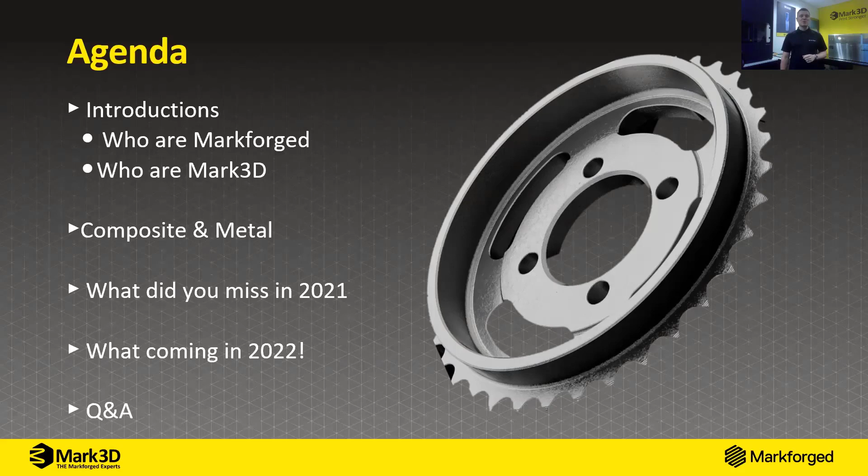So, who are Markforged? Most people have heard of Markforged these days. I mean, 3D printing in general is nothing new. It was invented back in the 80s by a guy called Chuck Hull. So, the history of 3D printing is there's tons of tech out there, all with their niches and positives. But Markforged came to the market in 2013 with strong parts. What they were fed up with was real big, high-end printers costing millions of pounds, just in the blue chips of the world, and no accessibility to real engineering grade materials. So that's where they stepped in with their composites, and it's gone somewhere from there.

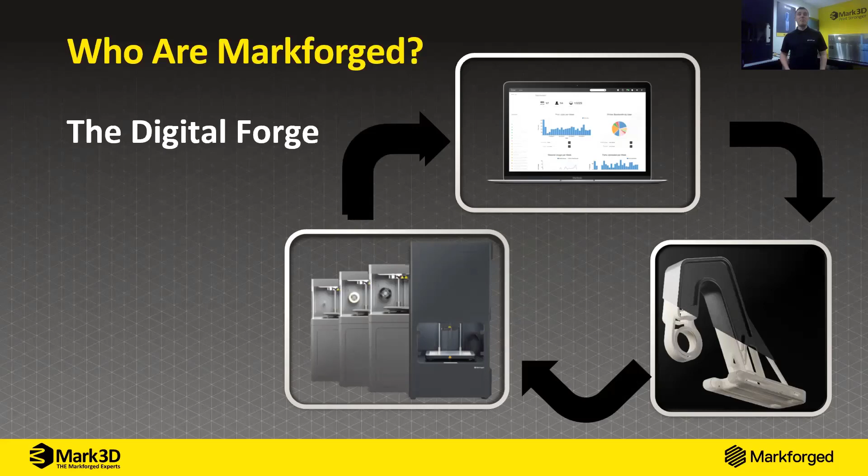They've gone into metals and with supersizing composites. So they have this concept of the digital forge, which is the marriage between software, engineering grade materials, and precision equipment. And that kind of closed loop concept gives you repeatability and your part at the end of the day, which is what you're really interested in.

So Mark3D, who are Mark3D and why do we exist? So Markforged obviously are based in the US, in Boston, or just outside in a place called Watertown at the moment. And they use a reseller channel, partners, to distribute, support, and teach you guys how to use this stuff in location. So Mark3D do nothing but Markforged. We have dedicated ourselves to their products, their software, their training, their materials. So it's all we do. So we're the experts in it, basically. So if you want to talk to Markforged, you basically come to us if you're in Northern Europe: UK, Germany, Benelux, Austria, a whole host of countries in Europe, basically. So we've put in literally thousands of machines, 6 offices, a load of employees. It's boring stuff really at this point, but essentially, if you want to know Markforged, you should be speaking to us. So enough of that.

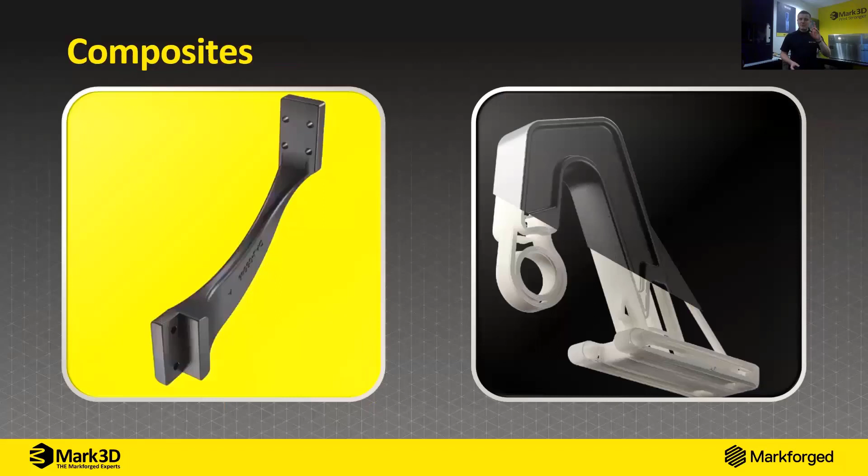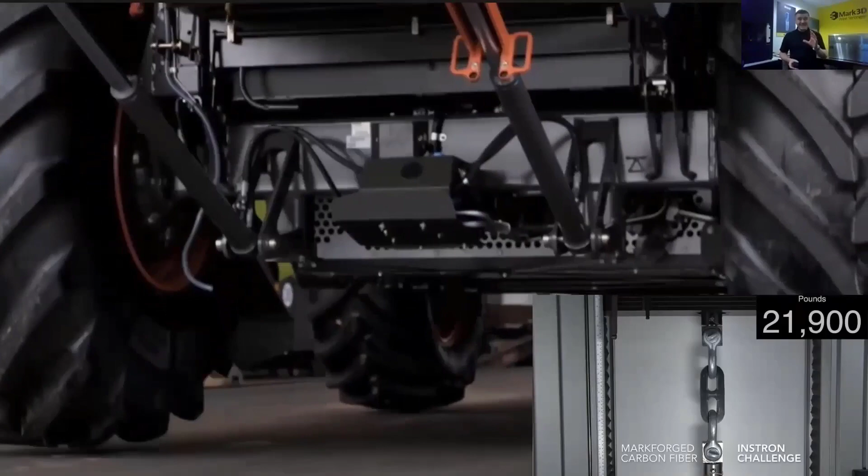Let's get on to the technology. Now, as I mentioned, there's 2 core technologies, composites and metals. So there's a brief video here, playing there basically. So this is a 20-second clip of the composite technology, just the workflow from software to printer to end-use part. What the composites really do, what our unique element is, inlaying continuous fiberglass that you can see there, picking up that combine harvester, which weighs 16 tons by the way, giving you phenomenal strength. So we're using like a polymer FFF kind of technique, which most people are familiar with, but inlaying those premium materials. So as I mentioned, that combine weighs 16 tons. In the bottom right, there was a carbon fiber chain link of the same size.

Looks like a problem with the sound. Okay, apparently people can't hear me. Bear with me just 1 second.

A bit muffled. Yeah, it sounds like it's coming out of an enclosed capsule. Okay, is it any better if I'm a little bit closer to the microphone? Let me try switching between microphones. Bear with me, one second. Better? Okay, perfect. I'll just speak up and I'll be a bit closer. It's a bit in your face, but apologies for that. Okay, as I was saying,

composites, you saw that customer video of ours from Claas. That combine harvester weighs 16 tons. The reason we can get these phenomenal properties is inlaying continuous carbon fibre, Kevlar, or variants of fiberglass to build up a strength and open up different applications.

So in the bottom right was a chain link with carbon fibre. That failed at just over 11 tons. That was printed on a desktop printer, not much bigger than if you put your thumbs and your forefingers together like that. Phenomenal strength. So if you're machining aluminium and you want that kind of strength, we can swap that out with a composite part printed overnight at a fraction of the cost.

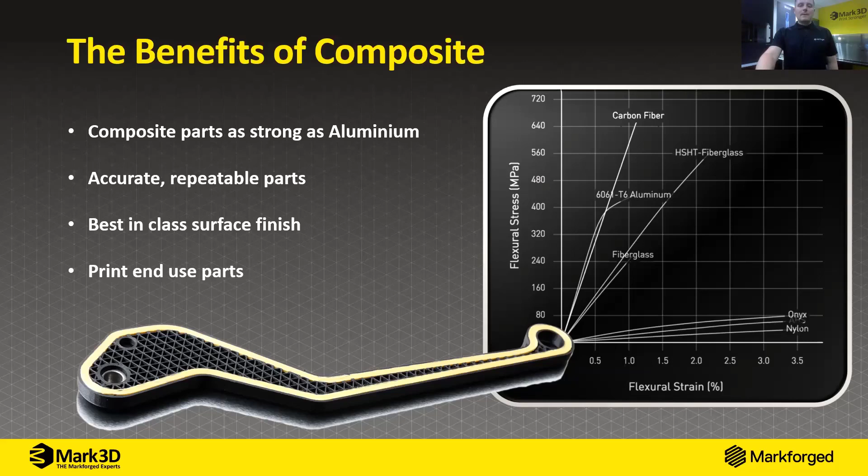As you can see by the stress strain curve there, we've got our polymers right down the bottom, but then the fibres we use also plotted against the 6000 series aluminium. So you can see the carbon fibre there with its flexural strength being phenomenal by comparison. So enough of the composites. Hope you can all still hear me.

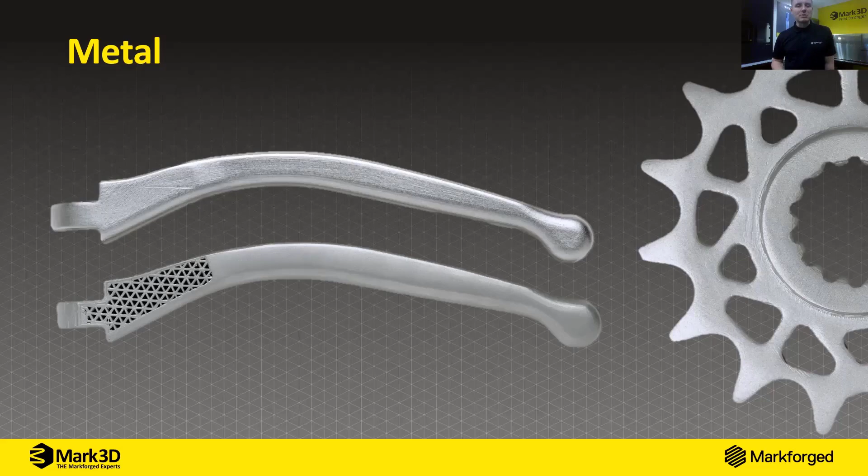Onto metal. So this was a new development around the 2017 mark. 3D printing metal is nothing new, but it has traditionally been phenomenally expensive. Beyond that, the health and safety issues of granulated powder are the main concern for people looking at it. It's not necessarily the price. If you've got the application, the technology's there, but bringing something that could be carcinogenic in a granulated form inside is a big no-no. So Markforged decided to address that.

And what they've done, they've gone for a blend between MIM and FFF technology, the filament technology that we extrude. So we put our metal in a polymer, in a wax kind of binder, and extrude that just like the polymer printers. Completely safe to handle. You can see the Metal X over my shoulder here. We can have that printing in any environment, in all honesty. Classroom environment through to workshop.

Then what we do is flip back to the post-processing of MIM. So we pop it in a wash, dissolve the wax. That gives us micro porosity, which allows us to burn out polymer and sinter our parts into a dense metal part.

Please try the other mic options. The sound is okay. Okay, someone's asking me just to flip between the mic again. Let me try something. There we go, guys. Apologies. Can everybody hear me? Perfect. Apparently that's clearer. So we'll crack on.

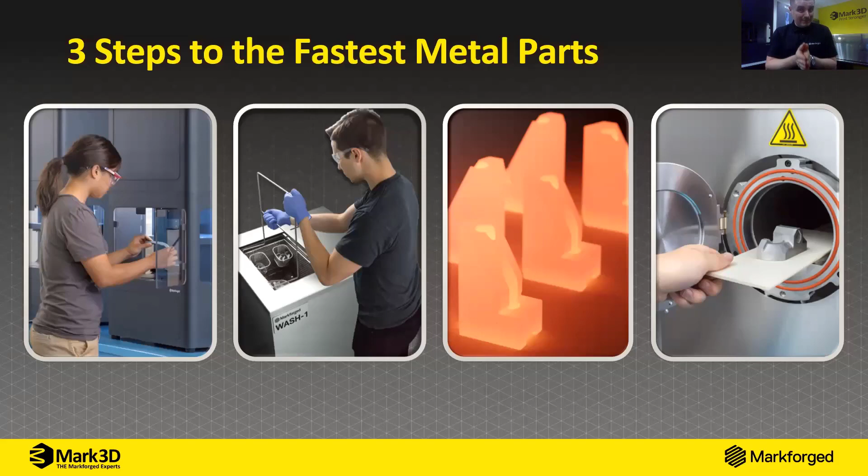Where I was, with this three-step process, it's the fastest way to a metal part. There are quicker technologies to produce and solidify metal, but total process time, this is the fastest, cheapest and safest way to a metal part. So you see in the top right there, we've got a speeded up time lapse of the printing process. Again, we're extruding that material, putting down a ceramic between the support and the part that breaks down in the furnace. So no machining of supports, they drop away after the sintering process. It makes it nice and simple.

Bottom left, you can see our Sinter 2 there. I've got a Sinter 1 behind me over my shoulder here. This is the furnace that Markforged have developed to sinter these parts. The real magic, to be honest, is in the software. When we extrude our parts, they come out in what we call a green state. It's like a hard clay at this point, but it won't represent your CAD. It will typically be about 20% bigger. After the wash and sintering process, that shrinks to size.

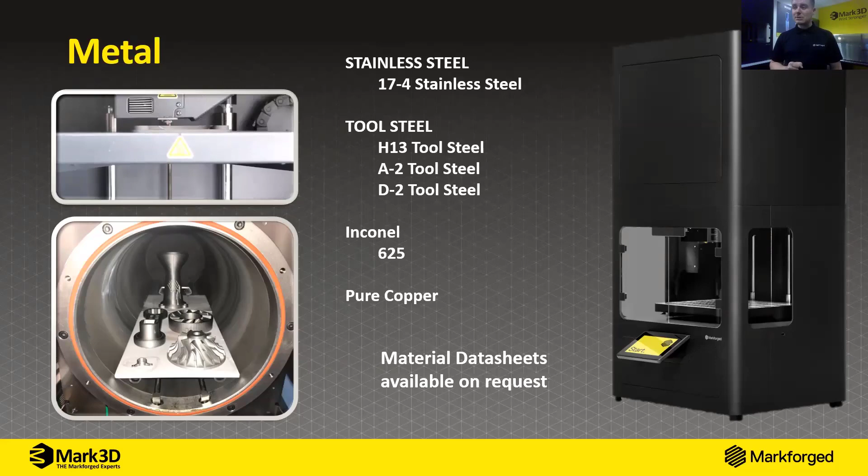You can see there the materials we currently have on offer from stainless, tool steels, Inconel 625 and pure copper. So it opens up a wide range of applications. Now the top 5 benefits of the Metal X then. Fastest metal parts. We're talking next day metal, a 2-day turnaround. That means there's no heat treatment afterwards to remove stresses, no machining of supports. Our surface finish is best in class. We can actually improve it while it's in its green state.

We can work it while it's like a hard clay before we sinter it to get a lovely near mirror finish. We're the only FFF style metal printer that can do solid parts. There's some technical reasons for that. It's to do with the debinding. There's 3 ways of debinding. We use a solvent to dissolve the wax binder. That allows us to do fully dense metal parts if you wanted to.

If you don't, we can put an infill structure, a triangular gyroid infill inside there and put a completely encapsulating skin over that infill. Now that's another unique benefit because with powder-based technology, you normally have to leave a face open, should I say, to evacuate that unsintered powder.

Quick release supports, I've already touched on that, but I'm a machinist by trade and I understand the frustration of getting a beautiful metal part out of a 3D printer to then have to spend a day programming and milling those supports away, especially when you're doing something like an Inconel 625, which just eats milling cutters.

There's 6 materials. I've already touched on those. I won't repeat myself, but the benefit is the changeover time is so simple. It's a spool on, spool off. We say it takes 10 minutes. It's 2 minutes manual time. We just have a warm-up process of about 6 minutes to make that filament malleable enough to start printing. It heats it up to about 50 degrees C.

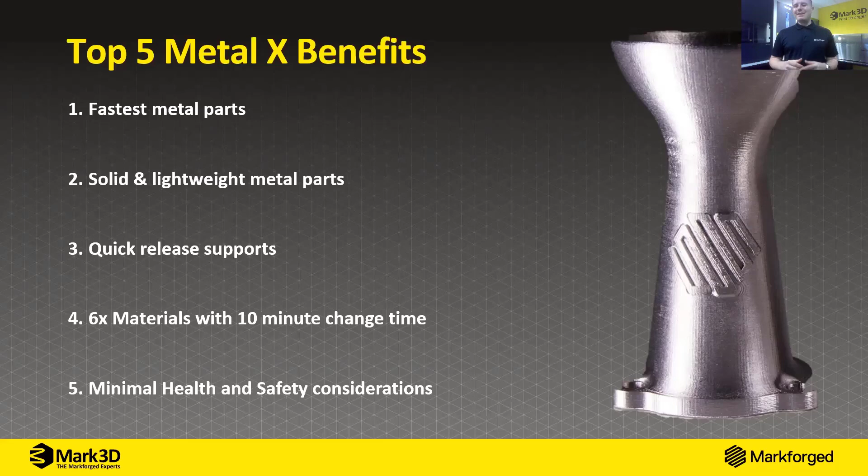And then the big one, the health and safety element of it. I used to run a 3D metal printer that was laser-based. I am not knocking it because I loved my machine, but I used to look like a beekeeper. I'd have a positive air pressure mask on, anti-static shoes, paper suit, there'd be all kinds of PPE. And now we just press print, get your part, away you go.

So we've covered the materials. Let's cover what Markforged released in 2021, just in case you missed it. So starting with part quality, people think we're best in class surface finish, but we're constantly working on our parameters to improve that part. And the reason for that, everyone likes a nice part, but if you're making end use parts that you're selling and you're replacing injection molding or machining, you want the best part you can get.

So on this screen here at the moment, we've got a picture of what we would call our unidirectional roof fill. So that's the back and forth motion of the extrusion on your top face of your part. Now, you used to be able to see what we would call tram lines. We've now improved our parameters, and that is a lovely, beautiful, smooth finish now.

So if you're already a user of Markforged and you've got your file, what we call an MFP file, set up, just printing, please reslice it. You're going to see some beautiful improvements just through reslicing, not through any hardware updates or anything like that.

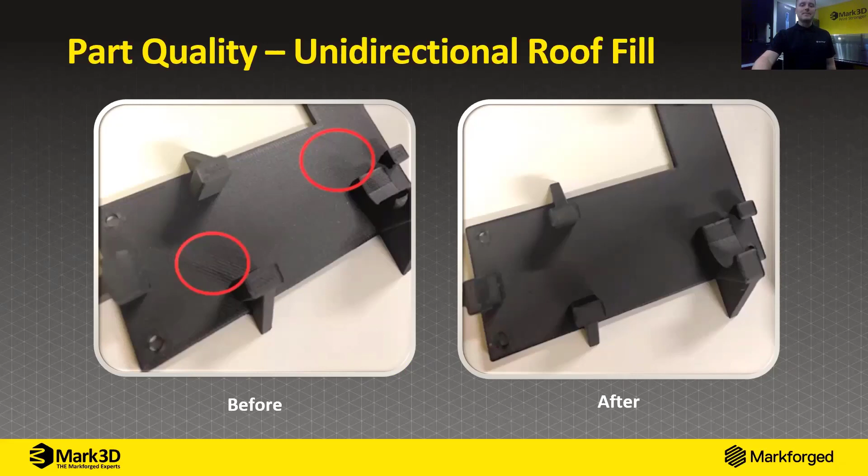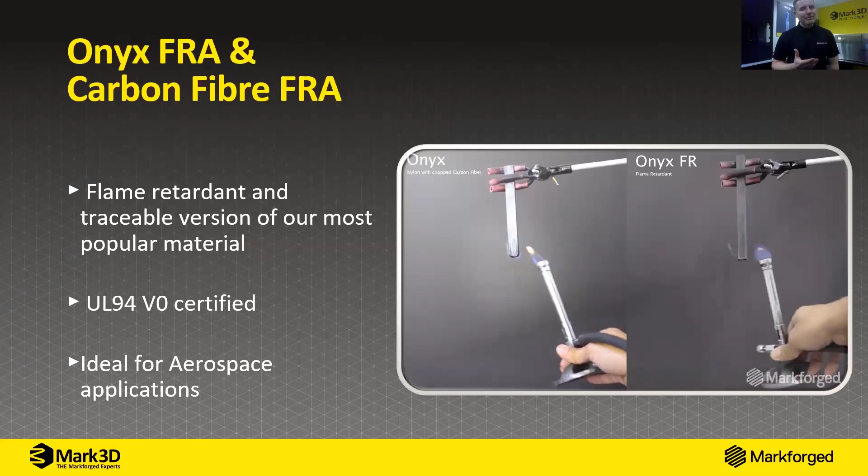So new materials, we're constantly releasing new materials. In 2021, we released Onyx FR-A and carbon fiber FR-A. So we had FR already. So if you're not aware, we have a flame retardant version of Onyx, which is UL 94 V0 approved. Basically, it just means self-extinguishing on a vertical sample, doesn't drip, those kind of elements.

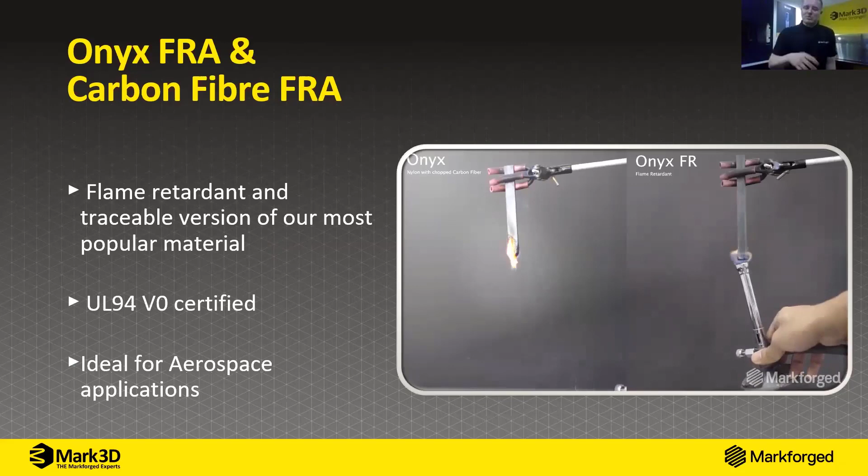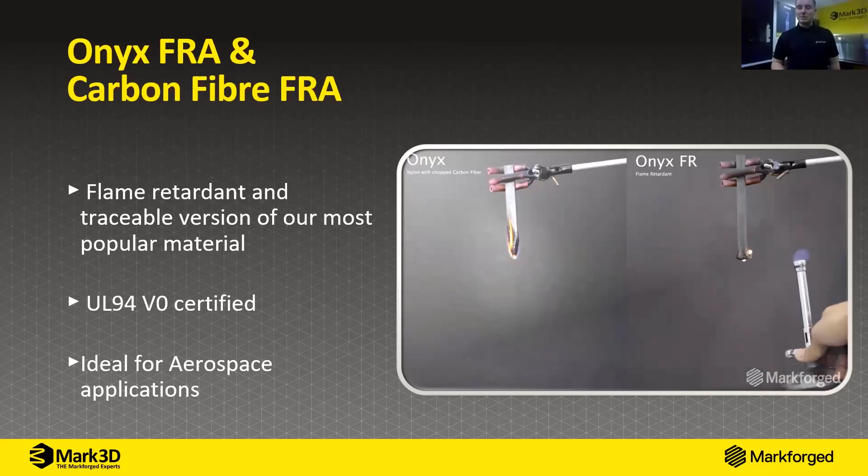What we've done with the abbreviation of A on the end is made it traceable. So we'll supply the certificate of conformity and traceability on those materials. So if you're in aerospace, if you're in the rail industry, if you're making parts where you have to prove your bill of material came from here and followed this process, this is the material for you. We obviously had to do it for the carbon fiber as well, because there's no point in just printing a polymer. We have to give you the strength behind it as well.

Machinery wise, my favorite printer at the moment, it will be replaced soon, but at the moment my favorite printer is our X7 in the showroom. This is the industrial composite printer. It is phenomenal. I won't get into all the ins and outs of it, but I just love it. What Markforged did is release an even tougher version of their printer. And what we mean by that is they ruggedized it, made it useful in field.

So you can see there, the top half of an X7 sitting on top of a Pelican case. But it's not just stuck in a box that's airtight. They've put everything you need in there to run for months on end in field. There's material storage. There is all the spares, all the tools, everything you need to keep that running in field.

It's very military looking. And to be honest, the military use a lot of these. Stick them in the back of wagons, print on demand spares in the most challenging environments. But that applies to industry as well. Anything where there's a requirement to travel, this is now an option to keep it on the road, keep it moving and keep your parts printed.

Improve software. There's a lot to go through in software. The first one I picked sounds like a dull one: new views or GUI in Eiger. But what this is going to do, I can't share too many details today, is enable so many new features.

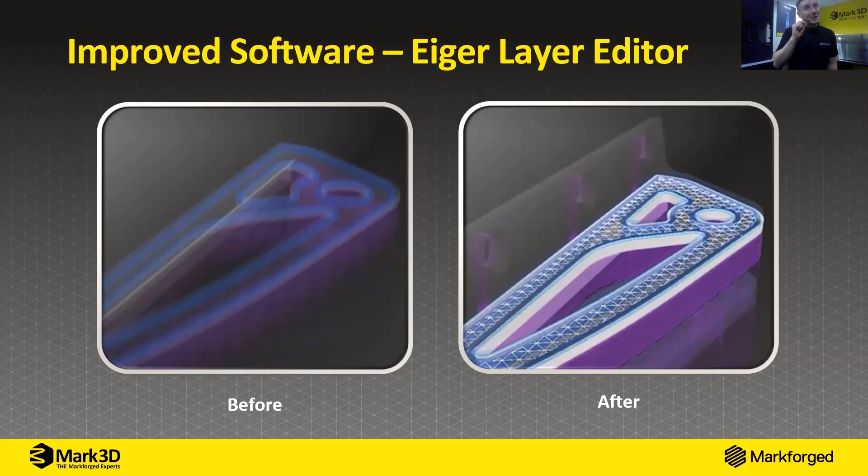But with ours, we're looking at all the faces that are supported, where we're putting that fiber, where we're getting the strength. We've got a much clearer view. And some of the things that are going to be released, I can't talk about just yet, are going to be aided by this.

Continuing along the software theme, we released Eiger Fleet. So if any of you are, shall we say, really into Markforged, you've got multiple sites with multiple printers, Eiger Fleet is really crucial. There's elements of security like single sign-on and things like that, but where it really comes into its own is role-based access. You can have super users.

You can have somebody that can only set prints up but not get the printer going. You can have people that can just run the printer, can't touch or amend the files in the software. It gives you real robust control over file verification and all the iterations and who can do what in the production line. It really is a benefit if you've got multiple locations with multiple machines.

You've also got API integration. So there's some fun stuff there, but we'd have to continue that conversation offline because it gets a bit technical for a webinar. We also have offline Eiger. This isn't a new element. We have had offline Eiger for a while, but in all honesty, before it was clunky. Now it's virtually a mirror image of our cloud-based software, just with no online access.

So we now have LAN support. So you can use your printer remotely on a private network, rather than before you'd have to download to your USB, walk to the printer and be there to run it. So offline Eiger, if you're doing anything that's very secure, IP related, military related, that kind of thing, offline Eiger's now a nice option for you.

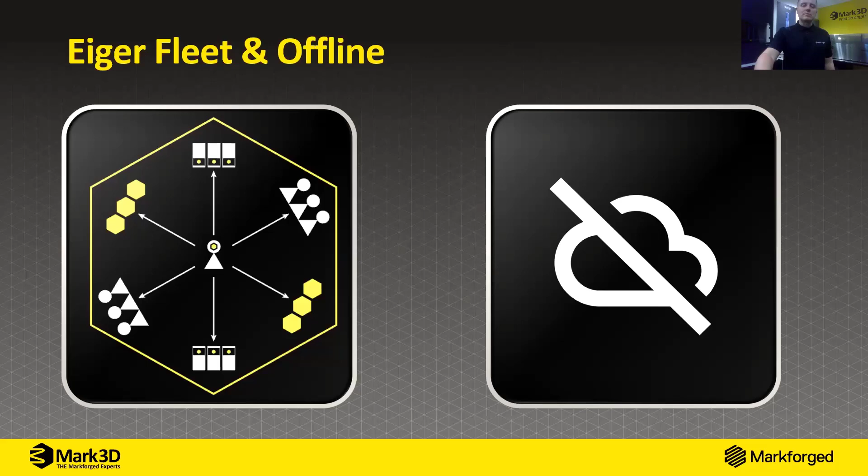On the metal side of things, what did we do in 2021? We doubled the speed of it. No hardware updates, nothing, just eking out marginal gains in so many areas. So it started with stainless. So again, if you haven't sliced your files in a while and you're using a USB or you keep your files somewhere else and just transfer them to the printer, please slice them again.

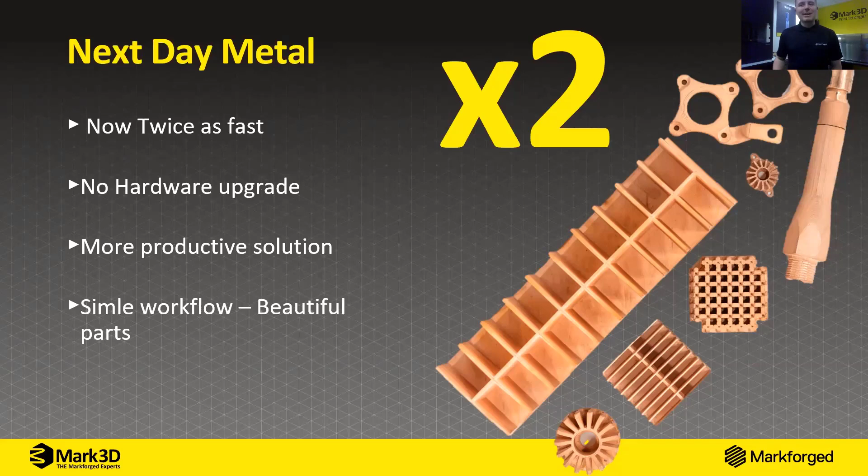The FX20. I can't speak highly enough about this new machine. Everybody loves a new bit of tech, but this is really a game changer for Markforged. Most people will know Markforged for their composite technology, which this is based on. A lot of people know the desktop or the industrial printer, the X7 I've talked about. This is going from desktop to industrial to production.

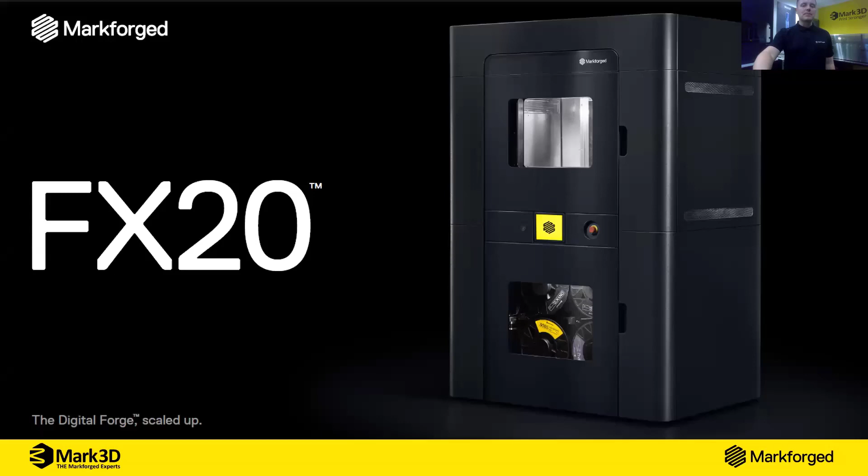We've got a printer with a huge volume that prints very fast with some new materials. So there's a brief video here that I'll just let run through and then I'll cover some of the benefits of the new technology.

Bit of dramatic music there. I thought it was a tad over the top when I first saw it, but I went and saw this machine in Germany at Formnext. We're getting ours late March, early April, hopefully, fingers crossed. It will be very soon, so you'll be able to come and see it.

It is fast. That's the main thing. It's fast, it's big, it's strong. We're talking about a build size of 525 by 400 by 400. So if you think about it, combine the polymers you're already using in Markforged with, let's be realistic about the build speeds. If any of you are a desktop user, the X7 can go twice as fast. This will go at least twice as fast again, hopefully a bit more than that.

So we're talking big parts within the working day. So you can get something really massive within 6 or 7 hours in some new materials. So I'm not going to go over the current materials that we have, like Onyx, which will be on there, and FR and ESD. But we've now got Ultem 9085, so a well-used thermoplastic. Now you can put it on steroids by putting carbon fiber in it.

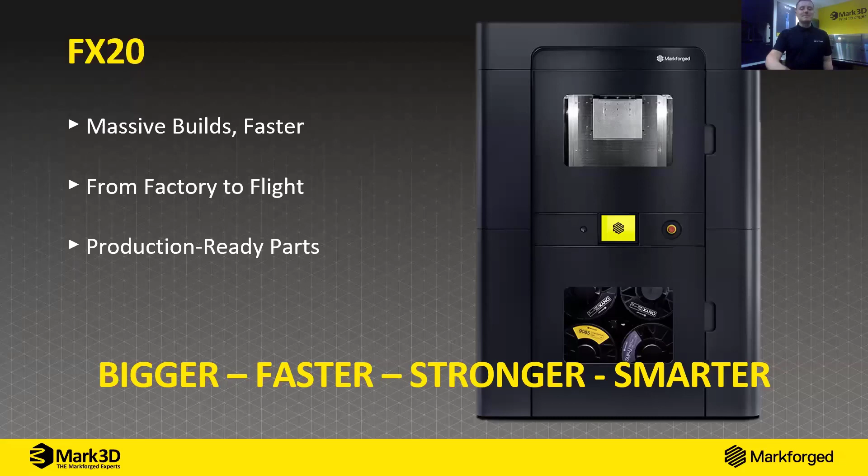People come to me, people have been printing Ultem for ages. I know that. You've got all kinds of people out there printing that material, but no one can make it strong. So we've got the elements of the flame, the toxicity, and the smoke characteristics of Ultem reinforced with a new version of carbon fiber for it. So, as I mentioned, carbon fiber meets Ultem. You're going to be able to make aerospace, automotive, end-use parts out of these kind of materials that are strong, finally.

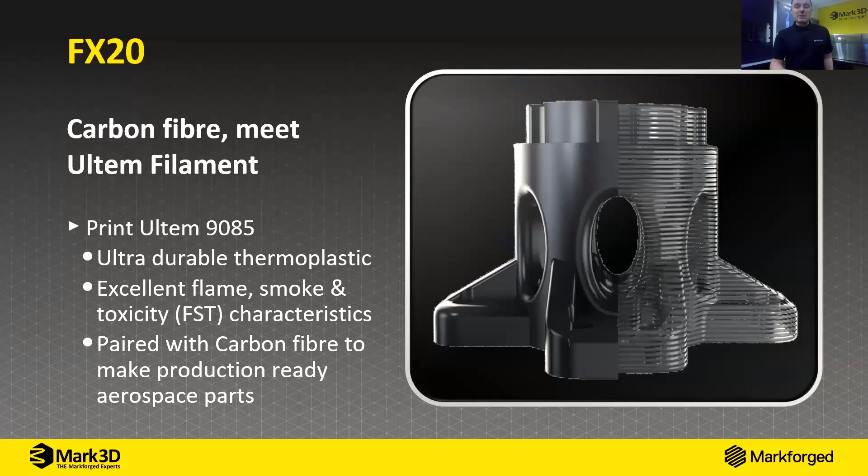So covering some of the product features of the actual FX20, I could sit here and talk all day, so I'll just go over a couple of them. We can always have a conversation another time if you wanted to know more, or you're very soon going to be able to see it. So the materials I talked about, everything that you've basically got on your X7, you're going to be able to do, plus Ultem with some new fibers in there.

Huge build volume. So this is our first printer that is with a heated chamber. You need that heated chamber to be able to do Ultem. We could not do it without it. But it also allows us to lay down material quicker. So when we're printing Onyx now, we're going to be able to heat that chamber up 50, 60 odd degrees. When we're printing Ultem, we'll probably go north of 150. Warming that chamber up, hammering that material down.

We've got 3 nozzles. We're not going to have to, should I say, set these nozzles either with shims or any of that. They're actuating on their own. So basically those nozzles will come down when they're in use and retract when they're not. We've got 3 nozzles, one for a polymer, one for the fiber, and one for a new support material that's on its way.

We've got a large touch screen on the front. That is what it is, but what it's all about is the user experience and being able to interact with this printer. This is the most sophisticated printer we've ever manufactured, and all the data will be at your fingertips on the machine or through our software remotely.

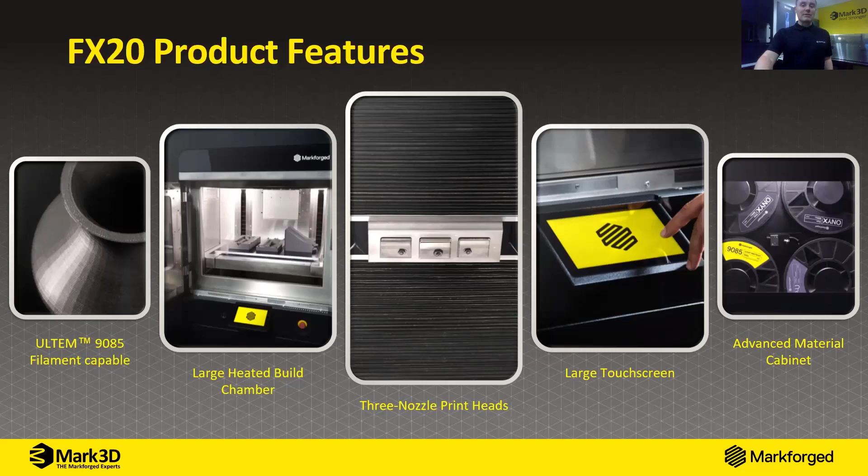And then the material cabinet sounds a bit dull in a way, a material cabinet. Any of you that are used to Markforged, you've got a 1 kilo spool of Onyx or the other polymers out there. These are now 4 kilos and it will hold 4 spools. And it will auto flip between them and auto feed these spools in. So we've got a big volume that can run for a long time without any human interaction. And that's very important if you're going to take parts straight to the factory floor or you're producing production parts that are for sale.

So I've kind of flown through the FX20 because I anticipate plenty of questions at the end about that. And we're going to very shortly be able to see it in the flesh. So we're going to be the first people in the UK to have it. And you're more than welcome to come and see it. We'll keep you updated about that.

So more on 2022, Blacksmith. So any of you that don't know what our Blacksmith software is, at the moment it's available on the X7 and it's in-process inspection basically. So it will calibrate the machine, it will inspect the part as it's printing, so you can basically check the fidelity of the internals of your part. Because we're additively manufacturing, we may have channels that you can't measure traditionally. The inbuilt scanner in the X7 can inspect these as it's printing, and then at the end produce an inspection report.

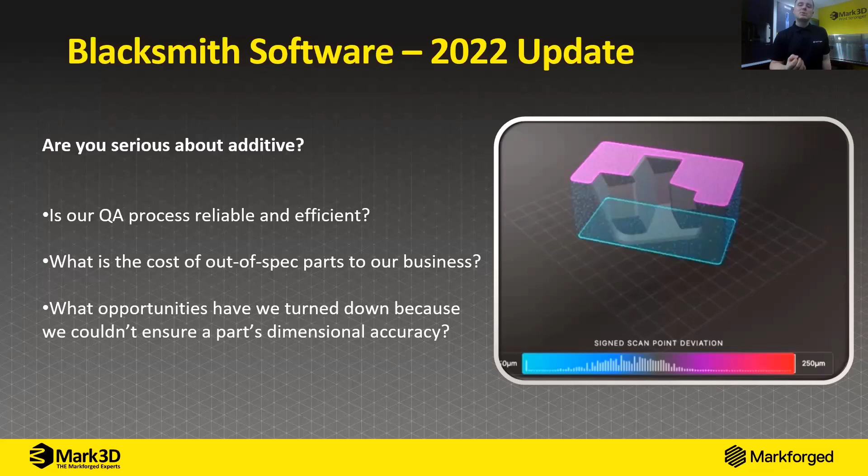What that allows you to do is basically go straight from printer into production, missing the QA department because it's now been automated. Anyone that makes parts, anyone that's got an inspection process cannot undervalue the importance of this. Everybody hates to have a part that they know is good but has to sit in a bottleneck of a QA department, or worse, a part that's wrong that goes in production and then has to come back out. So if you need more details on Markforged Blacksmith technology, we can talk about that. But in terms of updates from where it currently is to where it's going in 22, this month we've just released 2 new features.

So the inbuilt scanner at the moment, or until this month, had 3 options in terms of quality output. You could choose your point cloud density of low, medium, or high. What you can now do is vary it. You may have features on a component that need a lot of data points, a lot of curvature may be on there, like this element on the screen now, a knurled curved face. But if you're trying to measure a flat plane or feature, you don't need a lot of data. So you can vary how much data is collected from various points, which speeds the process up, makes it more accurate.

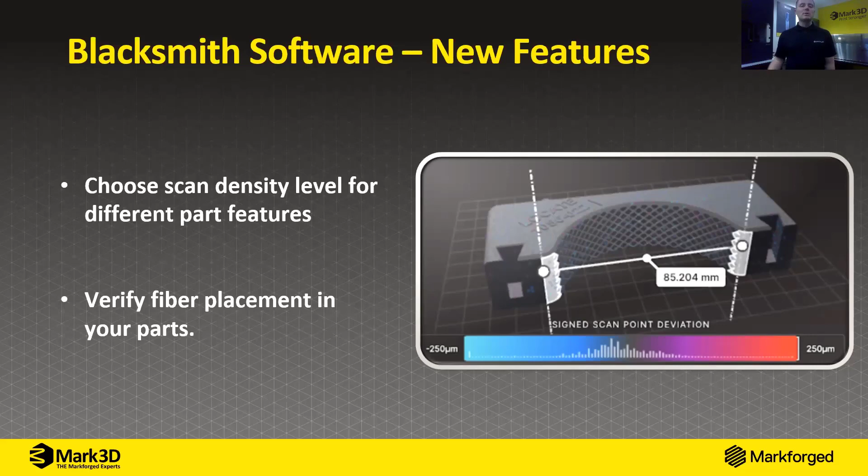And then the thing I love, verifying the fiber placement. Everything about our technology goes towards strong parts. But if you're going to put that in production, let's say it's going to go on a car, you need to verify the carbon fiber is where you said you wanted it to be. And that inbuilt laser scanner now does that as it's building.

So what else is to come? Honestly, I have so much in the back of my head that I want to share with you, so much, but there's some things I can't share without an NDA at the moment. So if we want to take a conversation offline, we can do that kind of thing, but I can promise you there is more materials coming. There's more on the composite side of things coming over and above what I've already shared.

There is a lot of new features and functionality. Some of it's going to be literally down at the desktop level. So you're going to benefit from so many new features this year without any kind of outlay or hardware upgrades, there's some exciting stuff coming. And there's a lot of accreditations and approvals going on.

We want to position ourselves with this FX20 in, as you saw, the aerospace, the oil and gas, the automotive industry. And with that, we need to be able to prove that these materials are fit for purpose. Things like NCAMP or whatever it may be, those kind of approvals, they're on their way. So it's some exciting times for Markforged in 2022. Hopefully this has been a bit of food for thought.